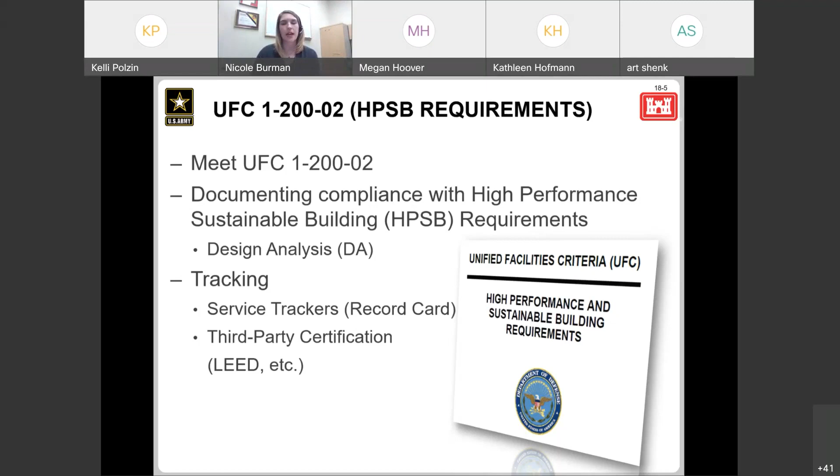For the record cards, you want to either click that link in the UFC, or go to the whole building design guide looking for the requirement tracking reporting page. Here on the slide, we've got the service-specific ones. USACE has theirs for the Army, Air Force, and NAVFAC has their information. Go ahead and grab the latest and greatest from that website, and make sure we're providing the detail everybody is looking for.

On this next slide, we've got really what is that reporting requirement. The reporting starts with that project delivery team. You're wanting to make sure that team is completing the HPSB checklist, scorecard, whatever it's referred to as. Really the best practice is making sure your district sustainability POC has this information, so they can identify and potentially talk to these projects, and make sure that individual knows how the process is going - catching issues early or if we're not meeting a certain piece.

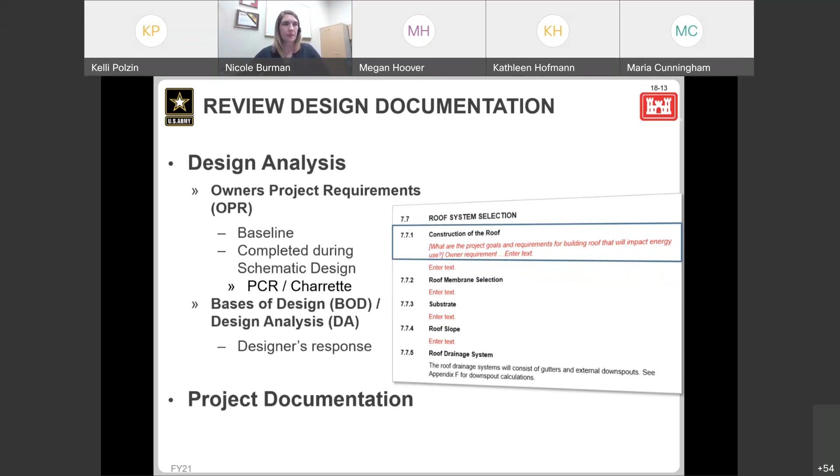Okay, so last slide on commissioning. We also need to think ahead and coordinate what those construction commissioning reviews will look like. One way is to have another designator inside your submittal register. We've handled it many different ways—it could be a discussion after the contract is awarded, figured out with the field staff and the DOR working together on which items are there. It could be defined in the roles and responsibilities matrix within that commissioning plan. There are ways to tackle it, but the most important thing is making sure we know which submittals are going to be reviewed and ensuring that it gets there.

So that the commissioning team can do their part, QA can do their part, and so forth. I have examples here of that being in the submittal registry, and examples on the bottom of a project's utilization of the roles and responsibilities matrix. This started off similar to the one in the ER—the commissioning ER, 1110-345-723, Total Building Commissioning. I've found that this roles and responsibilities matrix can take a while to hash out depending on the size of your project, your customer's involvement, and people's understanding of total building commissioning.

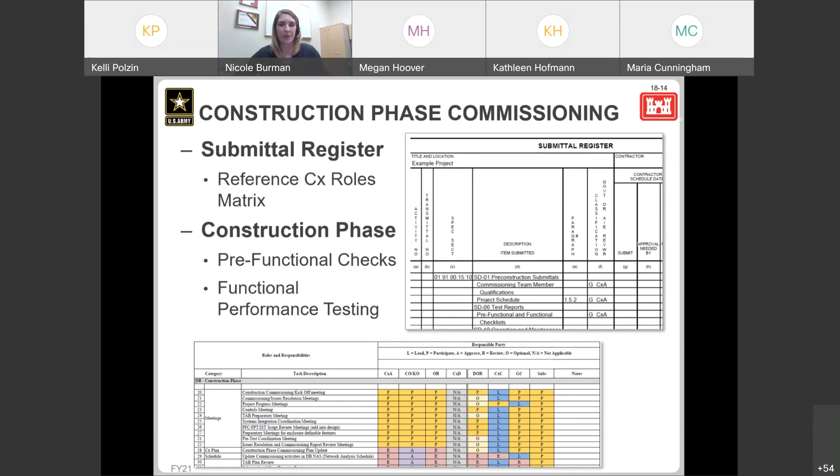Okay, so moving out of commissioning, going into third-party certification. Here we're looking at independent review and assessment, holding projects accountable for both the design and construction. There was research, a study, that shows the value of third-party certification, looking at the military and projects that have been done and what those benefits are.

It identified the benefits of providing operational cost savings, contributing to security, and improving indoor environmental quality. It's also important, when we talk about validating meeting UFC requirements, the third party serves that purpose in several ways.

And if we're not doing that with the third party, we would also need to validate that somehow, right? Self-certifying that we meet that requirement, and that could potentially cost even more sometimes than third party would, with our labor costs. So it just depends on how big of a team is working that, and what that cost would end up being, depending on the project.

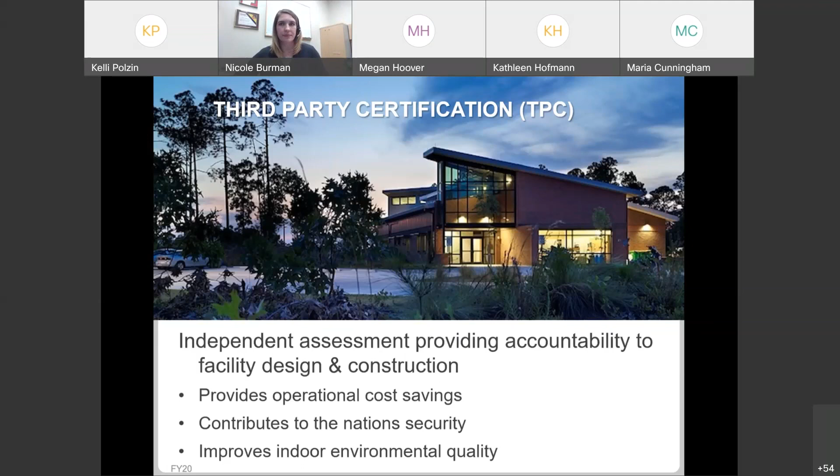So for third-party certification, we've got a couple of groupings. We've got GBI, the Green Building Initiative group, covering Green Globes and Guiding Principle Compliance. And then we've got GBCI, Green Business Certification, who handle LEED in a lot of these situations, and also the Guiding Principle.

So here I'm going to show the Guiding Principles assessment, just a quick comparison. We showed this on another one of our webinars, so I'm not going to go into much detail here, but I wanted to touch on something that for sure applies to Air Force.

So we're validating the UFC. We receive a point of contact for any questions and reviews. And both of these here are really showing the differences and similarities between GBCI and GBI's processes.

So we initiate it in some way, we get that project's surveys or registration forms, and then we go into the reviews itself. GBCI has that primarily, maybe I can point here, the design submittal and construction submittal and certification, similar to how LEED works, so they kept it pretty consistent in that sense.

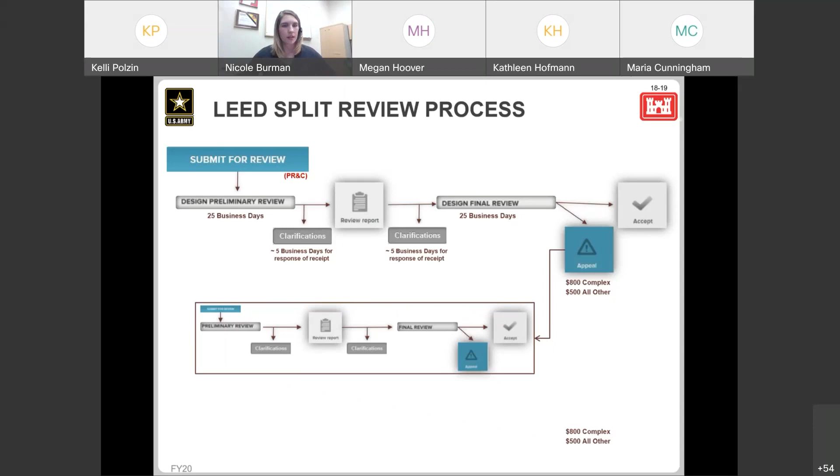Okay, so LEED documentation in general, it's good to know that when we're looking at these forms, we've got form information that's linked to credits.

So basically starting in LEED 2009, they started combining or making sure that all of the FTE counts, visitors, male and female ratios, etc., were the same on every credit, because that was an issue before. Everybody would accidentally input information differently. So that's what's happening in these forms that we currently have.

They're linked. Also make sure when your teams are starting your projects, they're going in these forms, and it may not look like that much to fill out, but the form expands. So you want to get in early and start clicking on some of your answers, because one answer may say we're going to go through path or option 2, and then it expands into what does it take to meet option 2, what does that documentation look like. And that will evolve over time depending on which option you pick.

So we want to make sure teams are not just looking at the initial form, but starting to fill it out so that they can see if there's additional information that they maybe haven't accounted for.

And then we're really looking at the LEED updates, their supporting documentation. In this scenario, there used to be an individual spreadsheet for material credits for each one. Now we've got worksheets, so it really should be helpful in that sense. We've got one worksheet that covers multiple credits. So that is helpful and potentially a tool that can be used elsewhere when people look for how much recycled content they're looking for, and so forth.

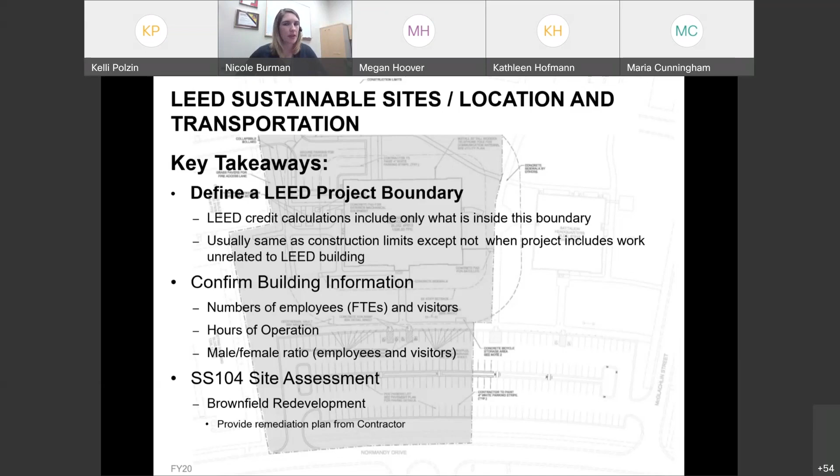So we have here a bunch of information, but I want to jump to what we've seen at ECB about waivers, because we're short on time, and if we can go back to the other stuff, we can.

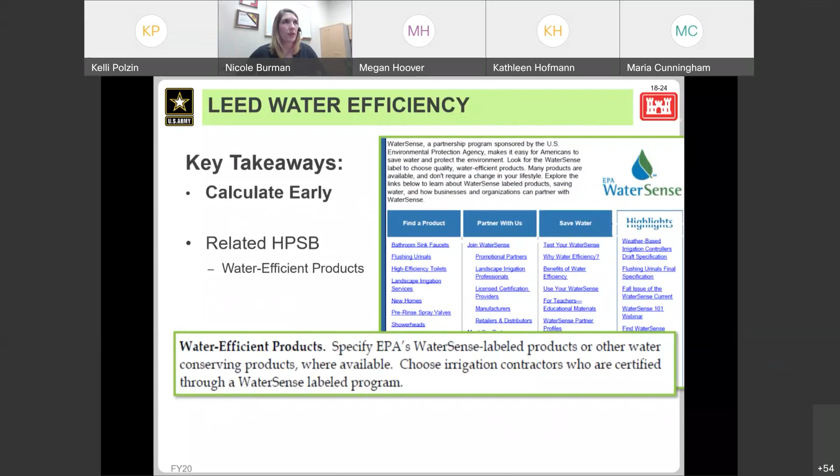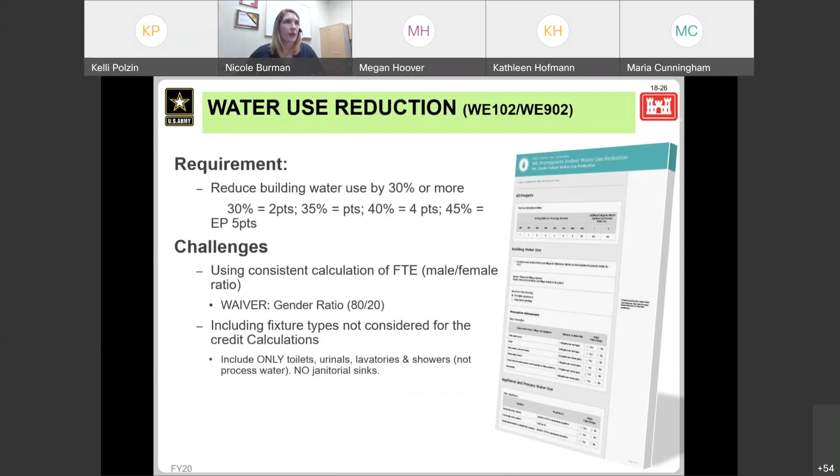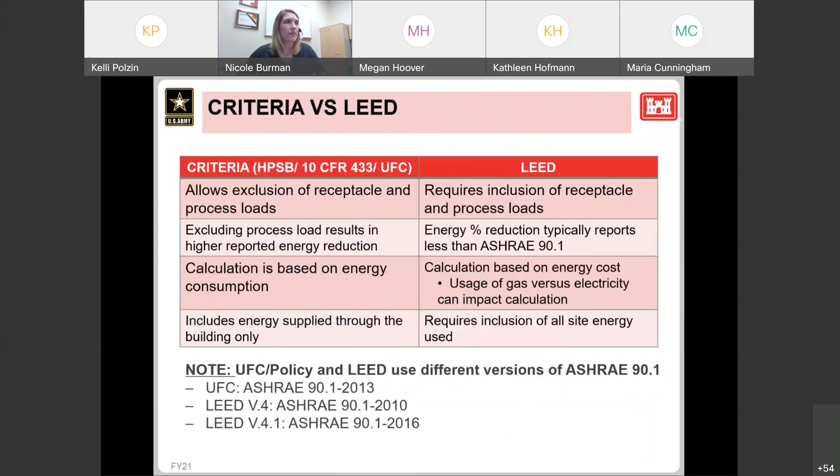I'll just scan through here. We're looking at all the site information, some information about water efficiency, best practices, key things we want to include, potential opportunities for innovation around water reduction, and several of these have actually been mentioned in other webinars. So I'm sure we've seen a lot of these or can review those before. I'm going to go ahead and go down here.

First, though, I will talk about innovation design and regional priorities. When you're documenting or looking at how these apply, we want to make sure that you're coordinating again early, so many things are early, and looking to understand the rules.

You can only have 3 exemplary performance credits within that innovation design. In innovation design credits, you have the option to have an innovation design credit itself or an exemplary performance, so you've gone over and beyond a threshold identified in some of the credits. But if you're going over and beyond, you can only get 3 total of those. You can't get all 5, I believe, that's there.

Then we're looking at making sure that there's a LEED AP on those projects. In version 4, it has to be a LEED AP, if you want to get that credit, somebody on this team, design or construction, has to be a LEED AP to the type of LEED certification you're getting. So if it's BD+C, they have to have a LEED BD+C. So that's a change.

Additionally, when you're confirming regional priorities, they're based off of that zip code. Make sure your zip code is identified correctly before you officially register everything, because the registration will then lock it, so you want to make sure that's correct. And that's limited to 4 regional priority credits there.

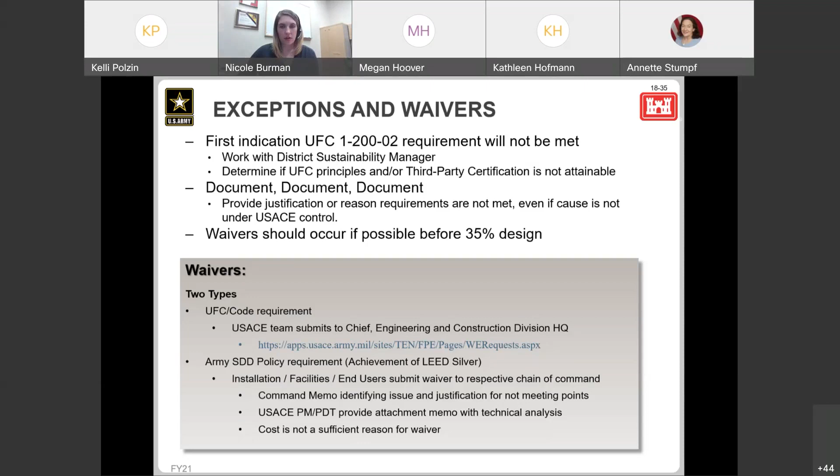Pilot credits can only be earned in that section with innovation points. That was a trick thing I didn't understand for a long time. In the ECB, the double green arrows are formal LEED v4 credits, 4.1 credits. But a pilot credit is not a formal 4.1 credit, it's innovation.

But again, you are limited to 3 for the exemplary, but you can do as many pilot or innovations as you want. Okay, so feel free if you have to dive off, but we've got one question up here though.

Or I guess it was about the BOD, the DA. So we're looking at separate BOD, which was directed, given to you from the end user and the funder. So you're saying, Eric, that they actually told USACE how to do their documentation and how they did the life cycle cost analysis. Okay, so it sounds like you received direction from the end user and how they wanted to see information. So you had that kind of as a separate package.